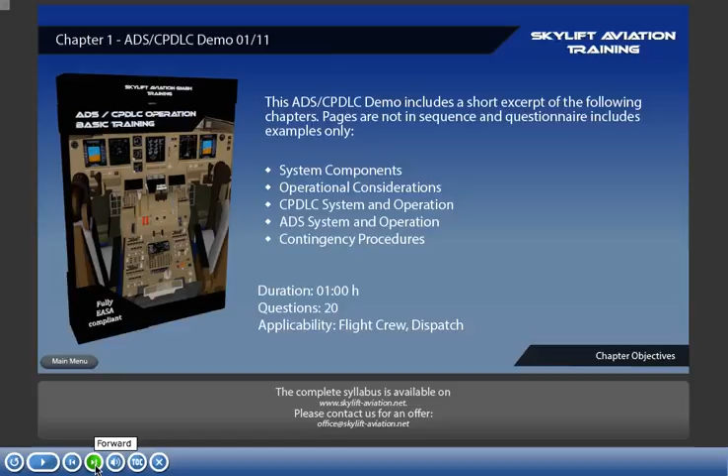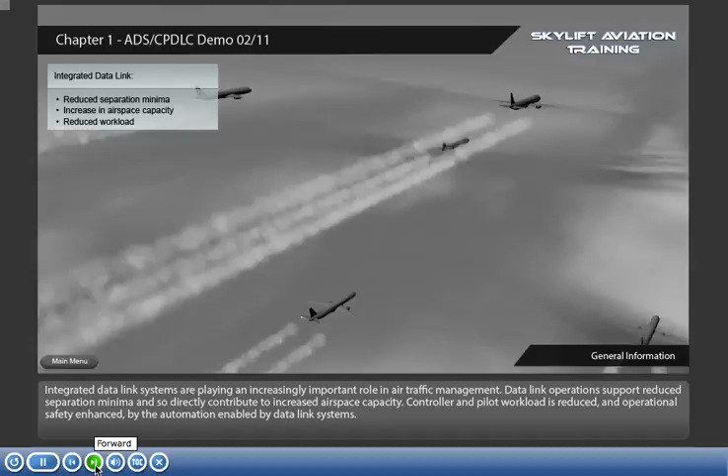Integrated data link systems are playing an increasingly important role in air traffic management. Data link operations support reduced separation minima and so directly contribute to increased airspace capacity. Controller and pilot workload is reduced and operational safety enhanced by the automation enabled by data link systems.

Components required for FANS operations include space equipment, e.g. satellites, air equipment, e.g. GPS receivers, FMS computers, ACARS, VHF radios, and ground equipment, e.g. VHF receivers, airline data system, ATC data system, ground earth stations.

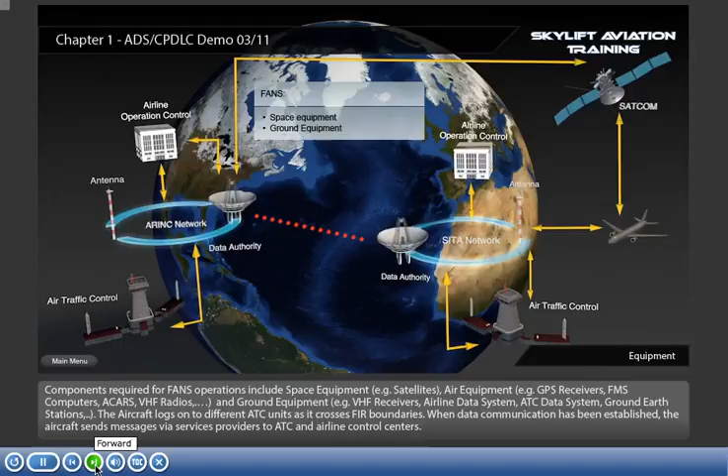The aircraft logs on to different ATC units as it crosses FIR boundaries. When data communication has been established, the aircraft sends messages via services providers to ATC and airline control centers.

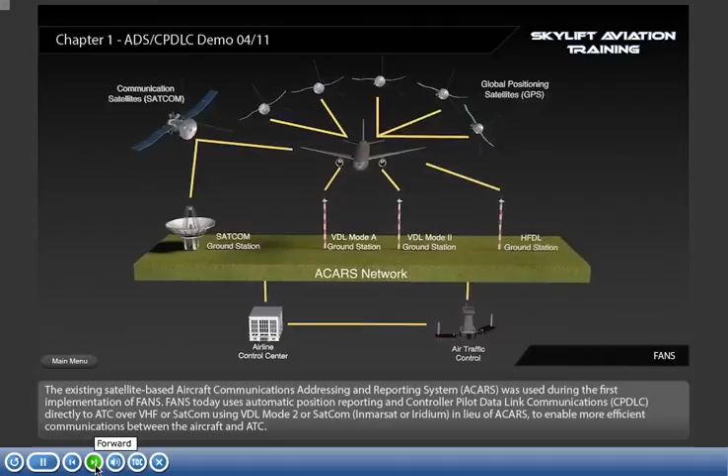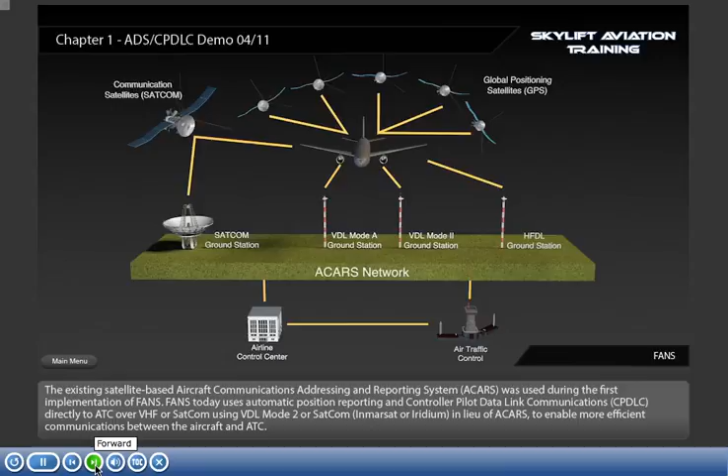The existing satellite-based Aircraft Communications Addressing and Reporting System, ACARS, was used during the first implementation of FANS. FANS today uses automatic position reporting and controller-pilot data link communications, CPDLC, directly to ATC over VHF or SATCOM using VDL Mode 2 or SATCOM, Inmarsat or Iridium, in lieu of ACARS to enable more efficient communications between the aircraft and ATC.

In oceanic and remote areas, information is passed between aircraft avionics and air navigation service providers via satellite links and terrestrial data network using the Aircraft Communications Addressing and Reporting System (ACARS) data link protocol and service provider networks. VHF and HF frequencies are within the line of sight of the aircraft. Messages are routed via the ground network.

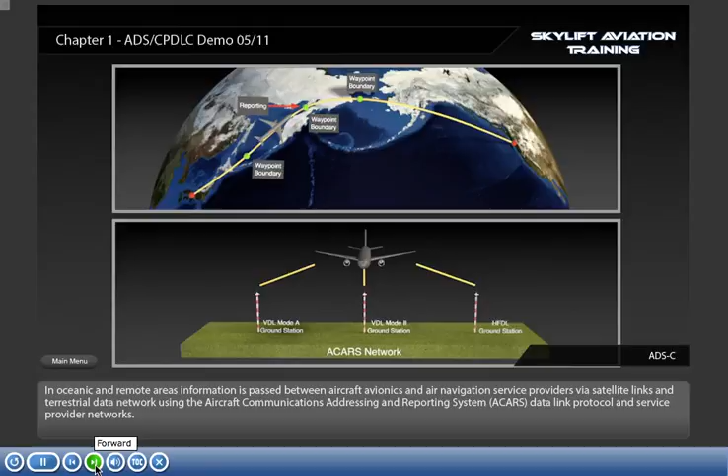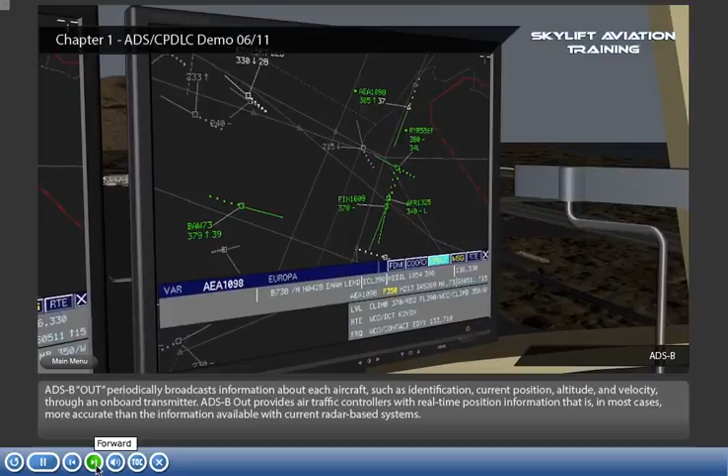ADS-B out periodically broadcasts information about each aircraft, such as identification, current position, altitude and velocity through an onboard transmitter. ADS-B out provides air traffic controllers with real-time position information that is, in most cases, more accurate than the information available with current radar-based systems.

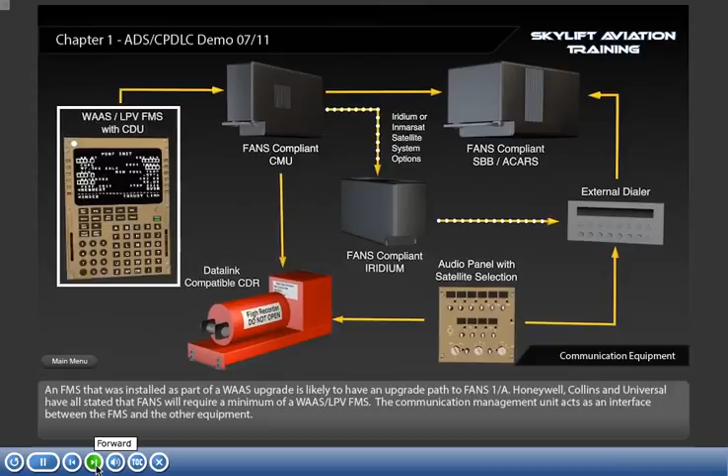An FMS that was installed as part of a WAAS upgrade is likely to have an upgrade path to FANS 1A. Honeywell, Collins and Universal have all stated that FANS will require a minimum of a WAAS LPV FMS.

The Communication Management Unit acts as an interface between the FMS and the other equipment. The most obvious system affected by FANS 1A is the SBB ACARS terminal, which is the data link communication management component.

ATN-B1 CPDLC requires a VHF data link, VDL, specification. Although ICAO has defined four VDL modes, VDL Mode 2 is the only specification pertinent to FANS 1A. ICAO has designated VDL Mode 2 for the ATN-B1 part of FANS. VHF, HF and SATCOM are controlled by the audio panel and/or through an external dialer.

EASA and the FAA consider CPDLC text to be a communications feature. As such, it is mandated that their recording will be done by the cockpit voice recorder. Older voice recorders, including many digital voice recorders, do not meet the specification required to record data link communications. Universal, L3 and Honeywell all make CVRs that comply with the newer data link communication recording requirement.

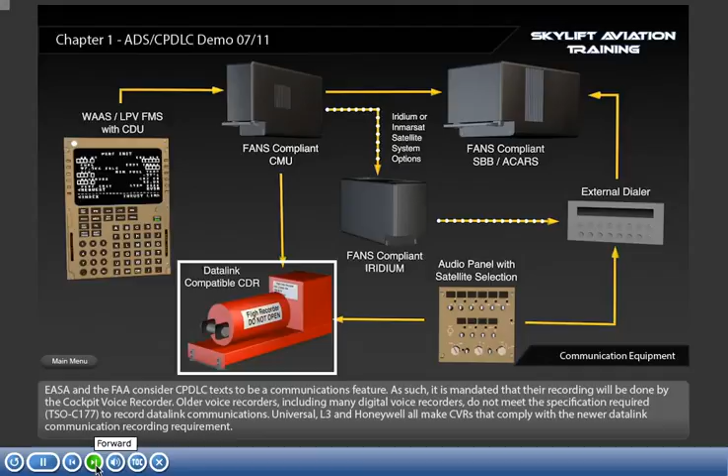One function of FANS 1A is that it permits ATCs to monitor aircraft outside the range of ground-based radar. Traditionally, flight crews report their positions via HF radio. HF radio systems are costly and require a great deal of power. The radios can be unreliable because atmospheric conditions may affect their performance, causing interference and noise.

Incorporating a FANS 1A compliant SATCOM Level D certification addresses these concerns by providing a more reliable and dedicated voice and data link channel that is available regardless of the aircraft's distance from a ground station.

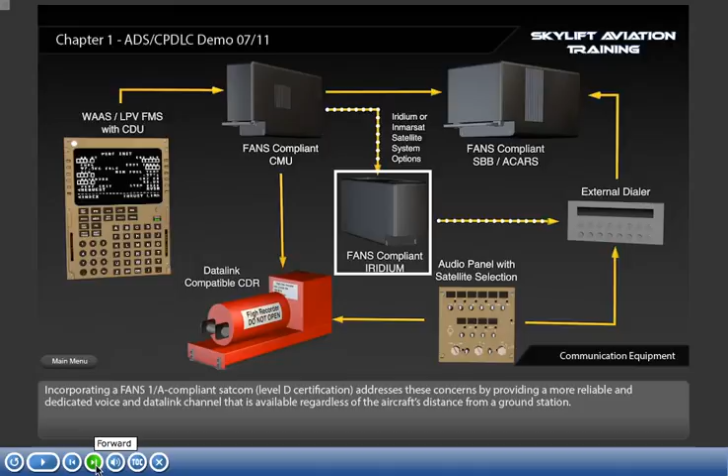Requirements for the navigation capability are the FMS, GPS, radio navigation, and an Air Data Inertial Reference Unit, ADIRU. The FMS collects data from the navigational devices and provides it to the communication system. It also monitors ATC messages related to navigational issues.

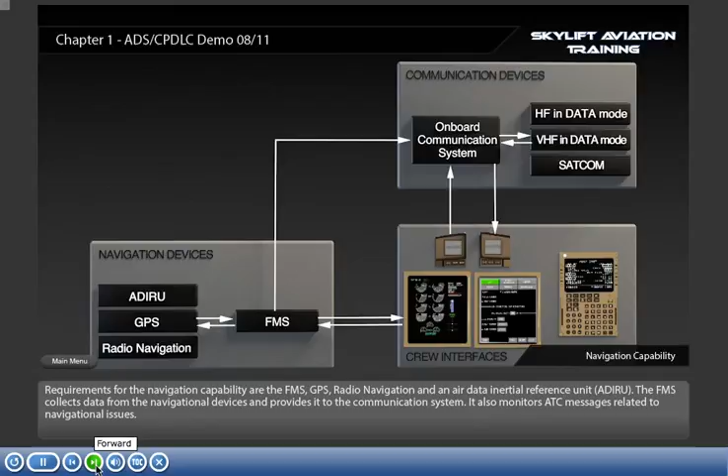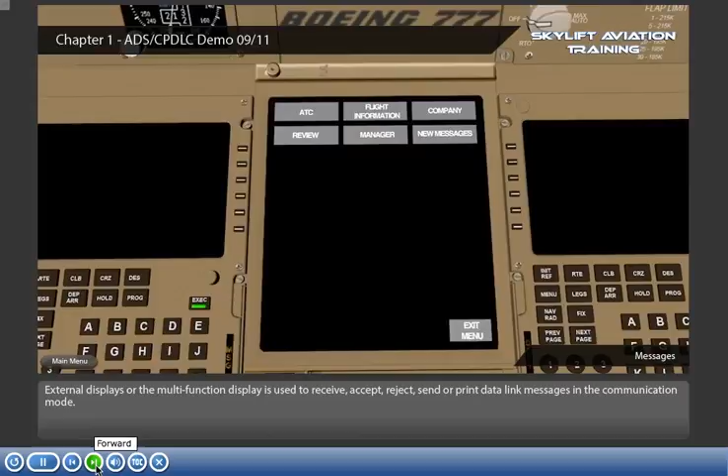External displays or the multifunction display are used to receive, accept, reject, send or print data link messages in the communication mode. In accordance with the ICAO flight plan, all information has to be entered into the system to establish data link communication.

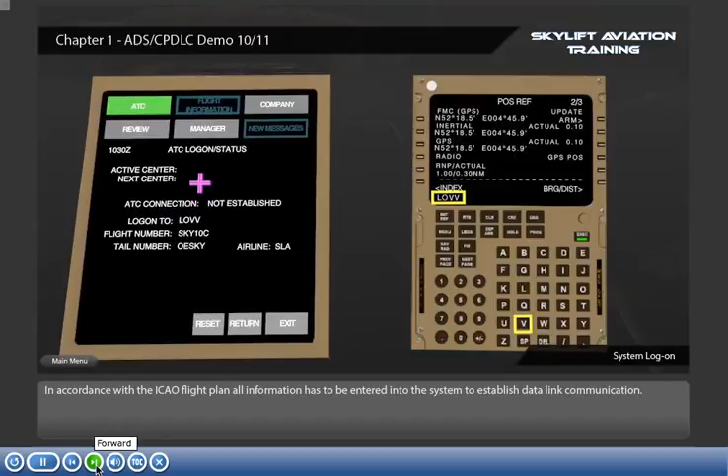Standard communication failure procedure will be followed in case of total communication failure. Area or state-specific instructions can be found in the route manual.